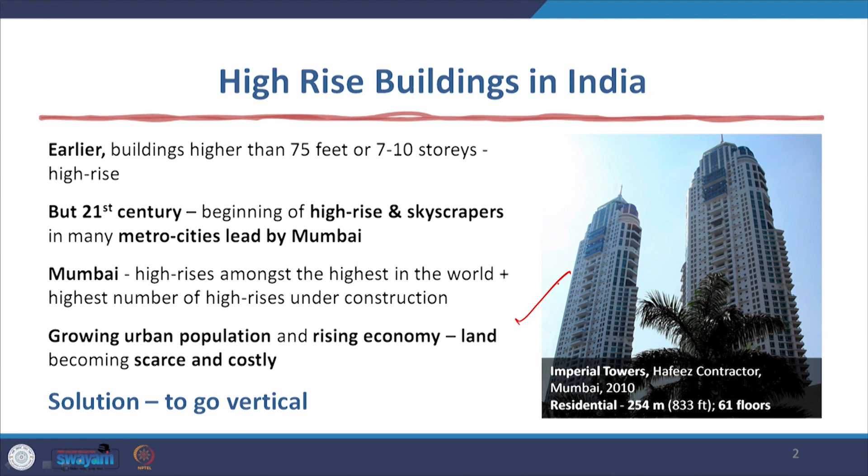The picture you see here is of a very iconic skyscraper in India, one of the first: the Imperial Towers by Hafeez Contractor in Mumbai, built in 2010, which is 254 meters high and has 61 floors.

Earlier, high rise design was predominantly focused on the structural system. But with advancing technology, not only in India but globally, advancing technology and shifting trends have led to much more creativity and architectural freedom in the design of skyscrapers.

If you look in the West, or in the Middle East, at Dubai, the Burj Al Arab, Burj Khalifa, or other skyscrapers like the Shard in London, or even the Swiss Re building in London, or the Hong Kong and Shanghai Banking Corporation building from the 1970s and early 1980s, the buildings of that time compared to the latest skyscrapers coming up globally now have amazingly creative forms.

Earlier, when skyscrapers began, they were predominantly cuboidal blocks, built with moment frame construction of steel and glass. With Fazlur Khan, a Bangladeshi structural engineer, joining Skidmore, Owings and Merrill, he was the first to start exploring different ways in which skyscrapers could be put together.

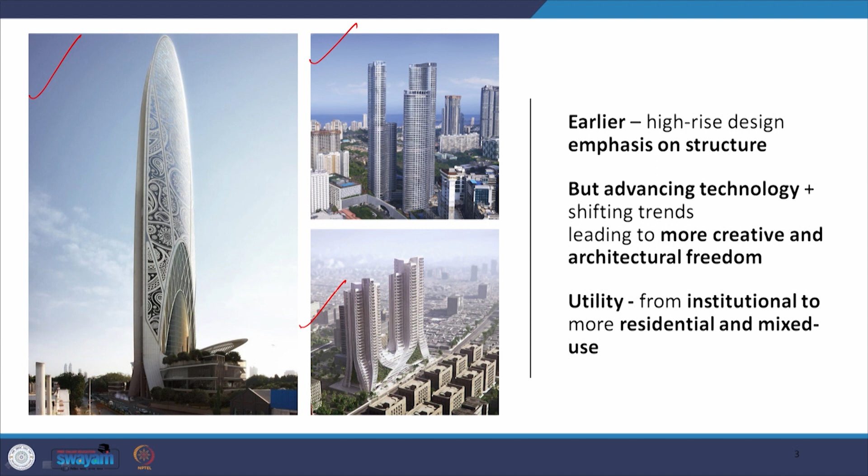Not only that, the utility of these buildings has changed. Earlier these buildings were predominantly connected with institutional purposes or corporates, but now more residential and mixed use skyscrapers are being built. Innovative materials are also being used.

For example, in India, autoclaved aerated blocks are being used, and they are substituting conventional infill materials like bricks. As you can see here, the infill material in this case is these AAC blocks, and these are becoming widely acceptable. Similar advancements are also taking place with regard to the building technology required to make such skyscrapers. That means the whole systems the contractors need to build so high.

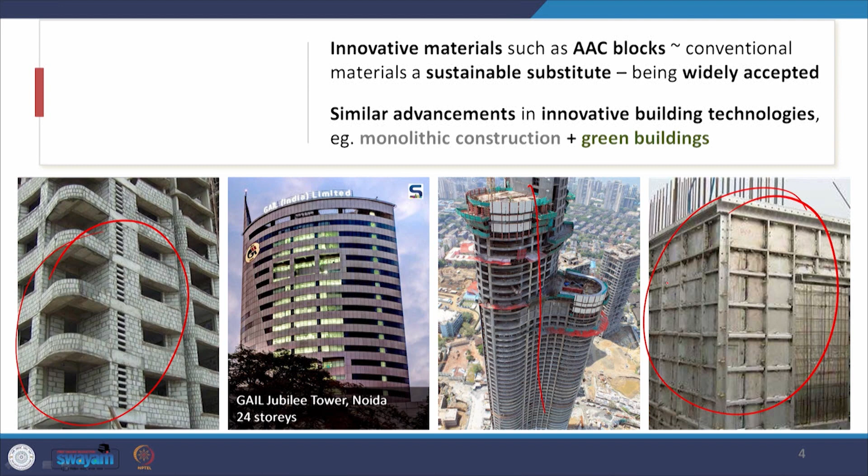Along with that, there are construction technologies like monolithic construction, also sometimes commonly called by a trade name, the Mivan construction, which is basically an aluminium formwork that is laid on the site along with the reinforcement, and concrete is poured into it. So when you take out the aluminium panels, the entire system is completely a monolithic construction, completely homogeneous.

And there is the idea of having green buildings in skyscrapers, like this tall building, the GAIL Jubilee Tower in Noida, which is 24 stories high and is a green building. It is said to be probably the greenest building in India today.

Now, high-rise buildings have economic advantages, and they contribute to sustainability by minimizing the building footprint. The economic advantage is that we are able to save on land. The sustainability advantages are that we are saving on, for example, agricultural land, and we are increasing the green cover.

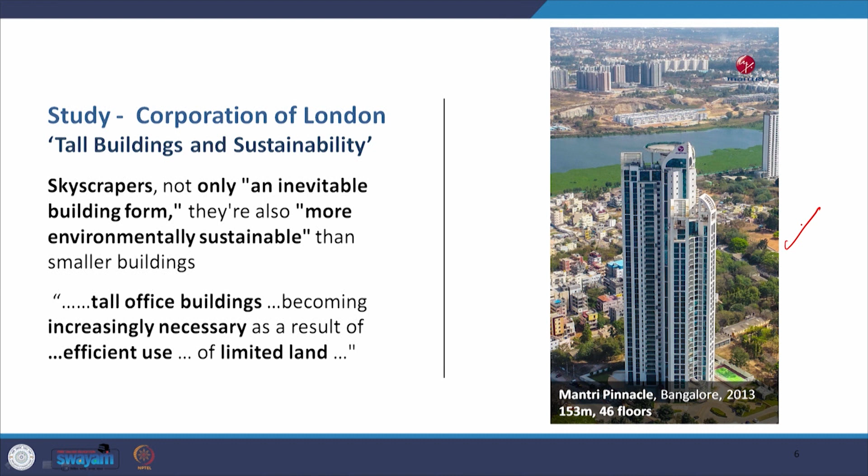There are many other issues connected with the negative impact of skyscrapers, and right now we do not have the scope to go into all those aspects, but this is another example of a skyscraper in another city, Bangalore. The Mantri Pinnacle came up in 2013, 153 meters, just touching the skyscraper bar, with 46 floors.

Now, the beginning was made with the point blocks that came up at Nariman Point in Mumbai. Modernist architecture gave India aesthetically simple point skyscrapers and slab blocks, very similar to what was coming up in the West. The only difference is that concessions were made for the materials available in India, the technology available in India, and the climate of India. As in other buildings we have studied, the same conditions became constraints when building in India.

Indian architects by this time were conversant with the concepts of European modernist architecture. But like I said, these buildings were again modified for the Indian climate.

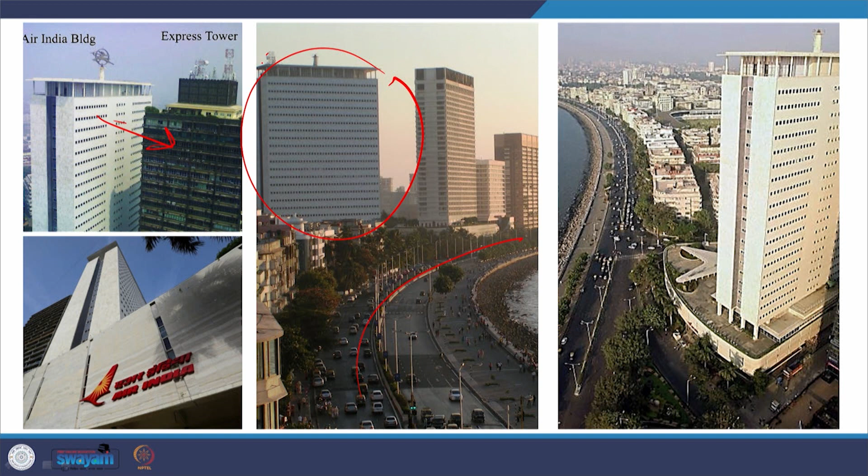Now along the Marine Drive are these important buildings, the Air India building. Behind the Air India building is the Indian Express building, which is visible in the photograph. Then we have the Trident Hotel, part of the Oberoi chain, and beyond it is the NCPA apartment block. So here it is, this is the Air India building, the Indian Express behind it, the Hotel Trident, and then this is the NCPA building.

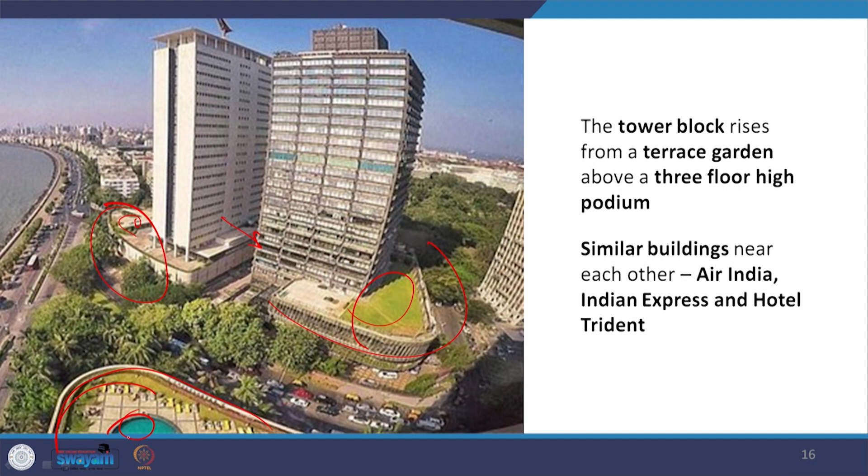Now these tower blocks, when they rise up, they rose from a terrace garden above a 3-floor high podium. So we find that happening in the Air India building. There is a podium and there is a terrace garden here. We find that in the Indian Express building behind it. This is a podium which is having a roof garden, and the picture has been taken from the Trident Hotel. So you can see the roof garden with the swimming pool of the Trident Hotel. So all three have the same basic composition. There's a podium over which is a roof garden, and then the main slab block rises up from there.

Now these tower blocks with podium was an idea where probably one of the first examples was the Lever House designed by Skidmore, Owings and Merrill, just across the road or adjacent to the Seagram building. They both came up at approximately the same time, the Lever House and the Seagram building. Lever House came up a little earlier, but the essential idea is Miesian, because the idea of this glass and steel slab block had already been brought in by Mies into America when he escaped Germany during the World War and came to America. He had started with the Lake Shore Drive apartments, and then he explored the idea in greater detail in the Seagram building.

Seagram building, please look up the picture online if you haven't. It's supposed to be one of the most beautiful, if not the most beautiful, skyscrapers of the 20th century. Such tremendous proportion. Now the Lever House is adjacent or across the road to that, and so what you have here is the podium. Now this is not a completely unified podium in the Lever House, because it has got a courtyard within the podium, and thus the idea is then explored here in the Trident, it is in the Indian Express building, it is in the Securities Exchange Board building in Mumbai.

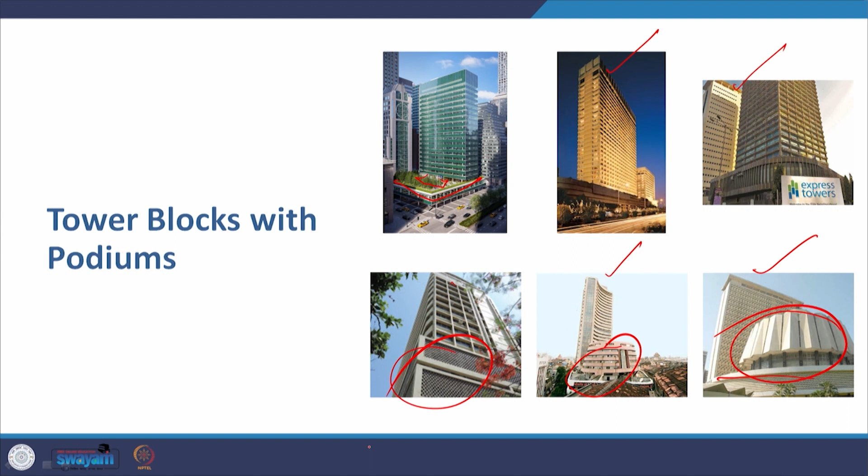This has this podium, and then I think this is the Vidhan Sabha, which also has this podium, and this I believe is the main legislative assembly part. This building again has a podium. So these tower blocks with podiums became a recurring idea of tall buildings in Mumbai. So here we have it. This is the Lever House.

Now the difference between, for example, the Indian Express building and the Lever House was this. The Indian Express building is the only tall building designed by Joseph Allen Stein, and in this building he provided these balconies, and these balconies also served as sunshades to protect the complete glass facade on the inside from direct sun and rain.

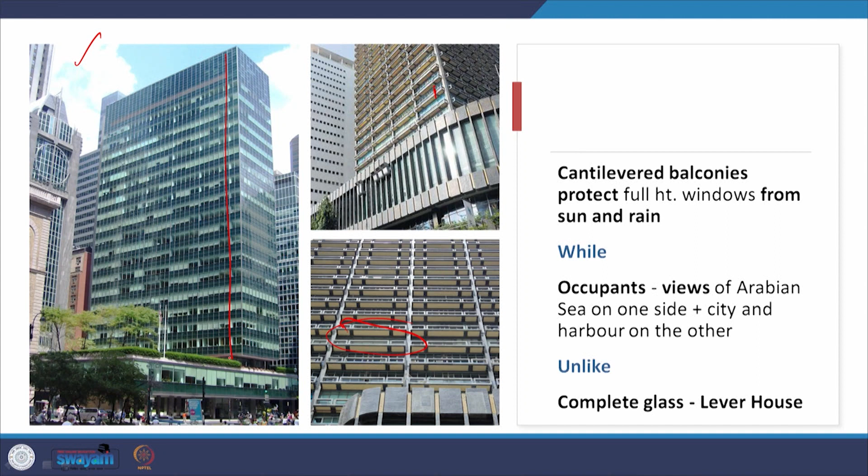That is, the outer glass facade has balconies in front of it to prevent the direct impact of the sun and the rain, while the occupants get a tremendous view of the Arabian Sea on one side and the city and the harbour on the other side. Unlike in the Lever House, where it is complete glass on the front, there is no need of sunshades or louvers to be provided there. So this is the difference that climate has made.

This is what I was talking about, the government building, the Vidhan Bhavan at Nariman Point, and again this has this lovely podium, and we have a business building, a corporate, so to speak, building, the Stock Exchange building in Mumbai. And thus the emerging skyline of Mumbai started happening. The financial center of India started evolving with all these tall buildings.

Not only did Charles Correa design the Kanchenjunga building, which was 84 meters high, a residential or apartment building, he also designed the Visvesvaraya Centre. This is an LIC building in Bangalore, and that's an interesting thing. Charles Correa designed 3 buildings for the LIC. One was the LIC Jeevan Bharati building in Delhi. I studied that with you, where that steel louver has been provided over that building facing towards Connaught Place.

And then there is the LIC building in Mauritius, which also has that pergola and that freestanding column. We discussed that. And then this was the Visvesvaraya Centre LIC. Now, those two LIC buildings that Charles Correa did were different, because they had the pergola and the freestanding column, and they were not very tall. They had maybe 7 or 8 floors, and that was it. The LIC Delhi was raised on a podium. The LIC Mauritius had these terrace gardens in them.

But this LIC building in Bangalore was actually a tall building, contrasting from the other two. This is a concrete building with a sculptural quality in an orthogonal pattern. There's a small interesting history behind it. I had gone as an undergraduate student in third year for a class tour with my batchmates, and we were staying in Bangalore.

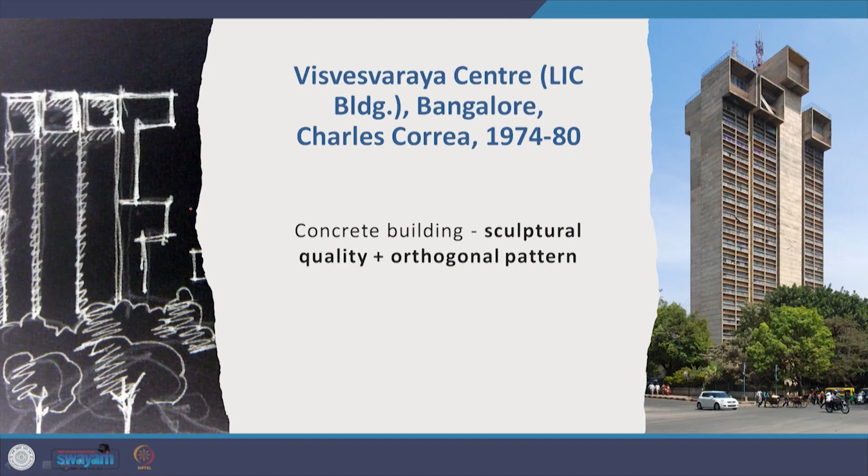Early morning, we were going for breakfast from where we were staying, and as we were walking down the road, we saw this building. Now we did not know who the architect was, but one thing that struck us was this was an amazingly interesting building. Very different from a standard cuboidal glass or RCC in glass block or steel in glass block, having these features at the top and the way the building has been put together. Not only that, it is brutalist.

And later on I came to know this is a building by Charles Correa. There's one thing that I would like to add here, and I don't know whether you found that to be true or not. When you come across good architecture, when you're going through a city and a building is interesting, generally you will find that there is a known name behind it, because that building has been done with a lot of care. The interest that it's generating in you is because it has that unique selling point, that unique thing about the way the building is, the form of the building.

So this building was a brutalist building. It is in raw concrete. These are the images of that. And then we had in the 1980s the works of Hafiz Contractor, which was in a completely different direction, because he followed postmodernism. Now postmodernism is completely different from critical regionalism.

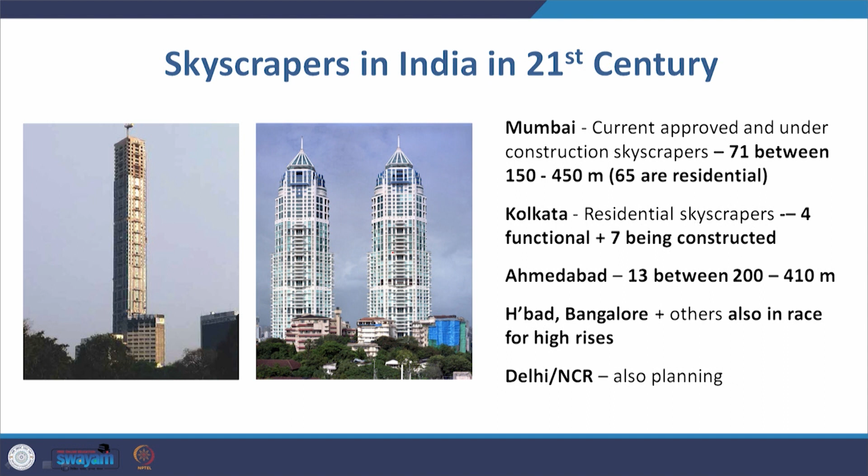Now, the skyscrapers in India in the 21st century: in Mumbai currently, there are 71 between 150 to 450 meters that have been approved, and 65 of them are residential. In Kolkata, 4 are functional, 7 are being constructed. Ahmedabad, 13 between 200 to 410 meters. Hyderabad, Bangalore, Delhi are also looking at the building of skyscrapers.

Now, skyscrapers in the 21st century: earlier there was a reluctance to build skyscrapers. Number one, because there was a ban. Number two, because of poor infrastructure, lack of expertise in construction technologies, and unorganized sectoral development in the construction industry. But there is a great demand from a growing economy, with 700 to 900 million square meters of residential and commercial space needed every year in our country today.

So there is now in the 21st century no lack of expertise of architects and construction professionals who are capable of building these skyscrapers independently, high-rise projects up to 200 to 250 meters. Now, along with that, there are many international structural and mechanical engineering and plumbing consultants who have set shop in India and are working from India assisting these projects.

In super tall buildings, that is beyond 300 meters, there is need of international collaboration to gain better understanding, but that will come very soon. It's only a matter of time that Indian architects and builders will be able to capture that. Contractors also need to perfect their understanding of planning the logistics of such tall buildings, the site surveys, the safety systems required during construction, and also focus on the finished product, the finishing quality of these skyscrapers.

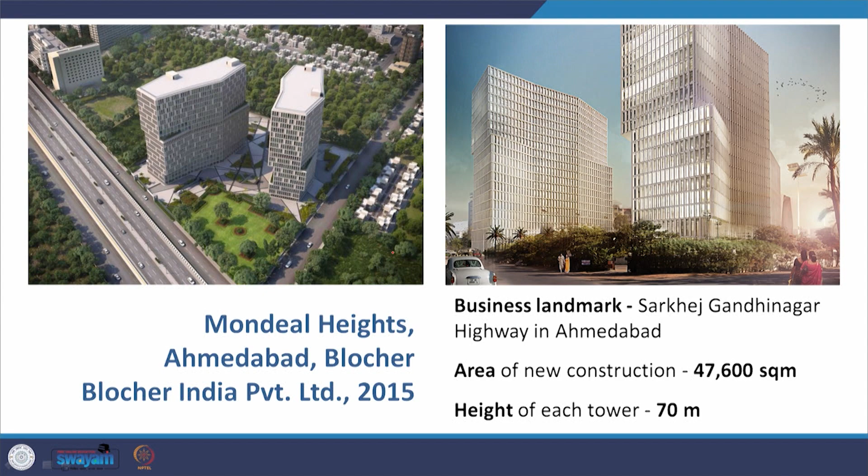So here we have an example of Mondeal Heights in Ahmedabad. I am taking a building off the normal circuit of Mumbai, Delhi, etc. to look at Ahmedabad, which is a business landmark on the Sarkhej Gandhinagar Highway with 47,600 square meters of area and 70 meters of height. It is an exclusive mix of urban structure with top technical standards, and it is a haven for India's modern business world. It's reflective of Ahmedabad, and the building plays with these shifting elements.

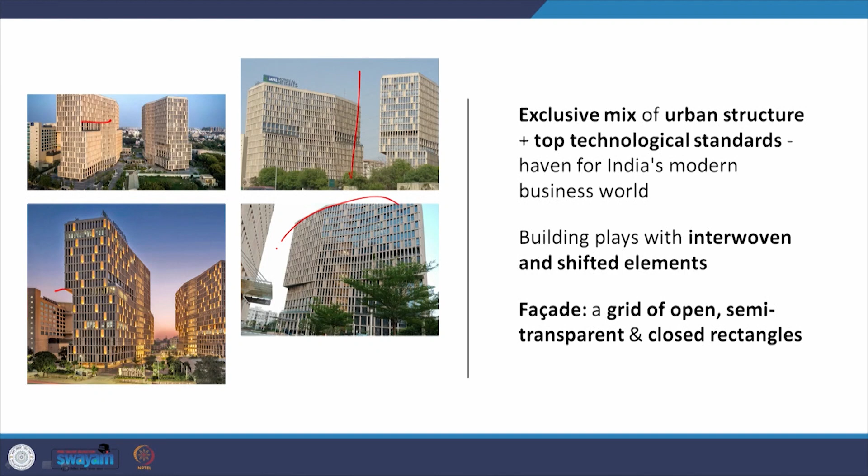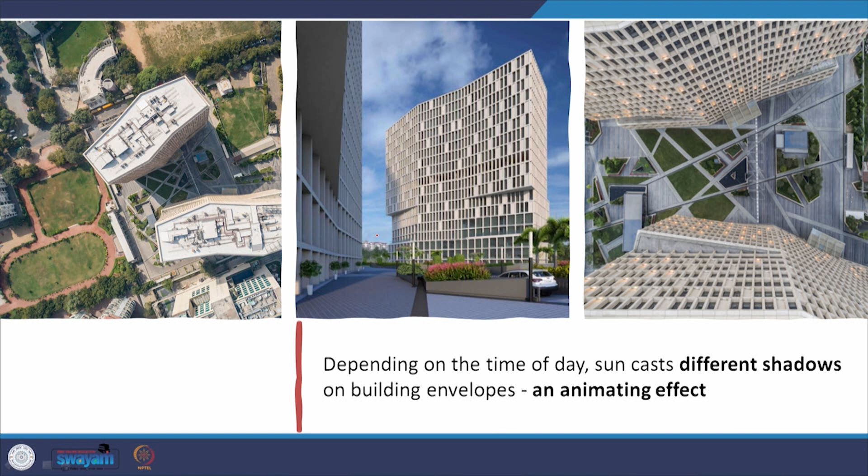As you can see, it's not just a cuboidal block rising straight up, it is playing with shifting the block, and also with the angle, it's angular, it's not straight line. So it's a grid of open, transparent and semi-transparent and closed rectangles that you see on the facade. There are these closed rectangles and there are these open rectangles all over the facade, and because of the form of the building, the sun casts different animated shadows on the ground, and these are the interior spaces.

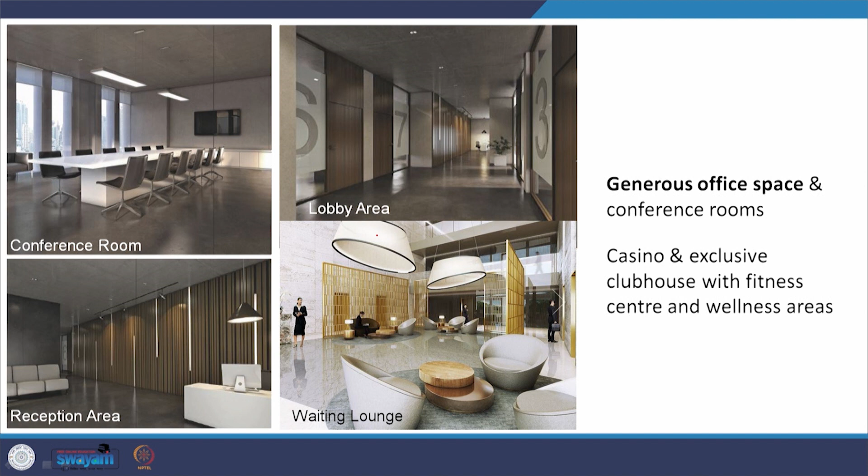There are these generous office spaces which is becoming a hallmark of skyscrapers, because top class facilities and amenities are provided for conferences, for other facilities within the building. Along with that, there is a casino, there is an exclusive clubhouse, a fitness center and wellness areas. Now, the structural system is complex. That is what I talked about, creative and architectural freedom.

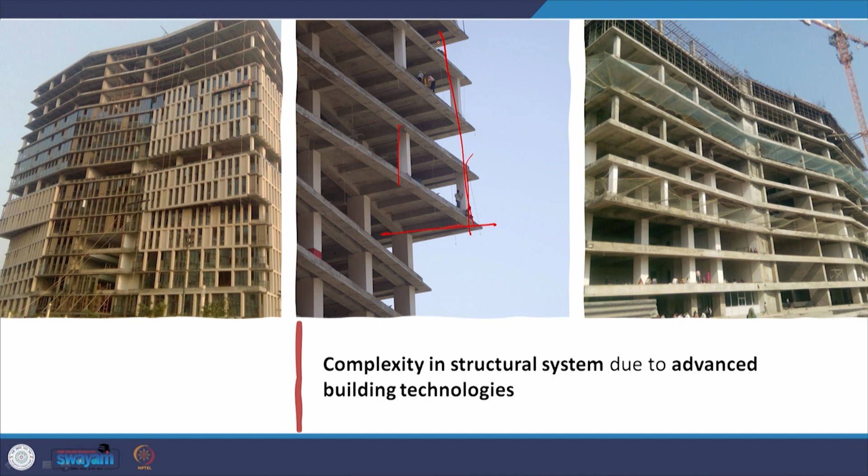As you can see, this part of the structural system is very interesting. It is cantilevered out, and then the columns are standing on top of that cantilever, and then these floors are going up. So this would have required quite a bit of ingenuity to come up with a structural system like that.

So I will end here with this presentation, and I will continue from here in the next presentation to talk about other point blocks and some of the futuristic blocks or skyscrapers that are going to come up in the days to come.